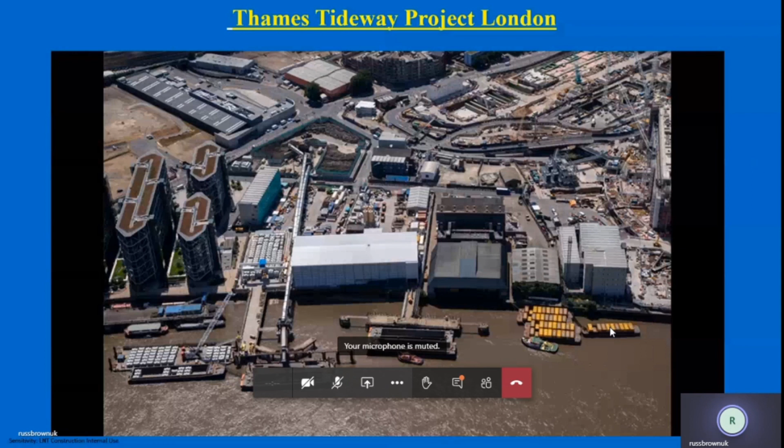So Transport for London, who's obviously one of the main stakeholders in us working and getting permits for all kinds of things, stipulated everything had to be by river. So lots of things came by river: cement, segments, and the spoil, obviously the big one. So we had to spend a lot of money on the development of conveyors and things like that. So that's just kind of where we are.

So in plan view, that was Kirtling Street we were just looking at, and the one tunnel came west towards Carnwath Road. That has actually finished and was amazingly successful, no problems. Now the other tunnel is just under 8 kilometres to drive to Chambers Wharf here. At the moment it's parked up at a place called Blackfriars, and it's done about half of its distance.

That also, by the way, is the tunnel which we started second. The reason we started the longest drive second was because this tunnel here we always knew was the easy tunnel for ground conditions, but within about 600-700 meters of launching this tunnel, we had to pass under another tunnel, which they call the Water Ring Main in London.

So there's a tunnel under London. It's about a 4 meter diameter tunnel, but it goes around London, and the ring probably has a diameter of 15, 16, 20 kilometres, something like that. It's all over London. And it's basically got fresh drinking water in it, pressurised water.

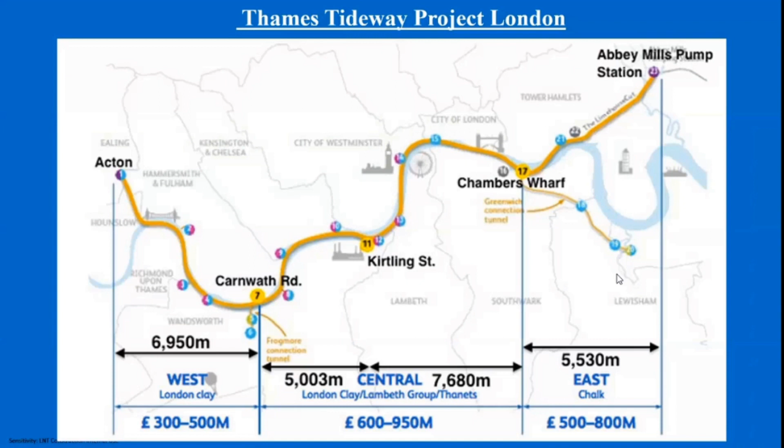So just a quick overview of the project and a general overview. Tideway is the largest water infrastructure project currently under construction in the UK and will modernise London's major sewerage system, the backbone of which dates back to Victorian times, although the sewers built in the mid-19th century are still in excellent structural condition.

The hydraulic capacity was designed by Sir Joseph Bazalgette for a population and associated development of 4 million people, where it's 3 or 4 times that now. Continued development and population growth result in the capacities of the sewer system being exceeded, so that when it rains, there are combined sewer overflows to the tidal Thames performing as planned by Bazalgette. So when it rains, all the sewers are overflowing into the River Thames.

To reduce river pollution, risk to use of the river, and meet bespoke dissolved oxygen standards to protect marine wildlife, discharges from these CSOs must be reduced. The Environment Agency has determined that building the Tideway tunnel in combination with the already completed Lee tunnel, that is another tunnel which is at the end of this Thames Tideway. The Tideway tunnel connects into the Lee tunnel, and the Lee tunnel is farther east.

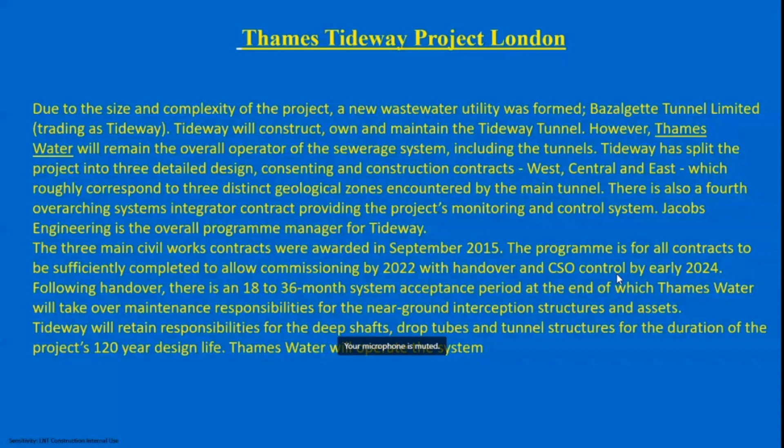Key elements of the contract. This presentation covers the central contract, which was an initial tender value of £750 million, times it by 92, 93 will give you rupees, or 1.2, so it's approximately $1 billion US, and is the largest of the 3 area contracts, which is a JV between Ferrovial Agroman, a Spanish company, and Laing O'Rourke Construction, which is a UK company. It's the main contractor, and they've appointed a main designer for the permanent works to provide the detailed hydraulic, civil, structural, MEICA and architectural design.

I'm going to kind of executively go through this rather than reading every word. Main tunneling activity is focused around the Kirtling Street site adjacent to Battersea Power Station, where 2 TBMs will drive out of the shaft, one for a distance of 5 kilometres to the west to get to Carnwath Road in Hammersmith and Fulham, adjacent to Wandsworth Bridge, and 1 driving just under 8 kilometres easterly to go under Tower Bridge to meet the east contractor, which is Vinci and Costain, at Chambers Wharf in Southwark.

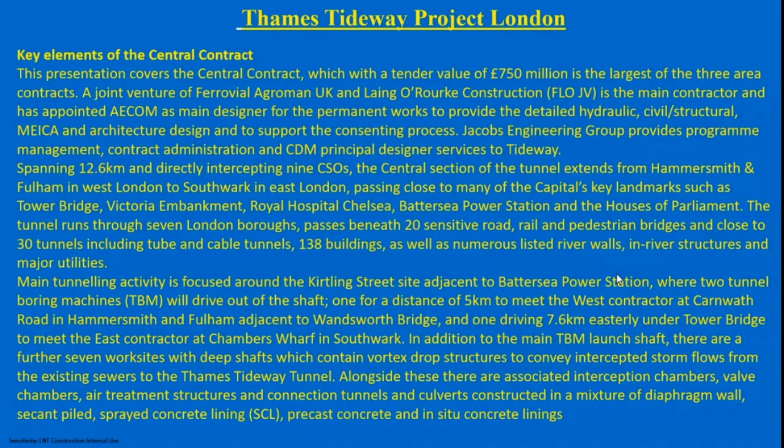Okay, key drivers and design challenges. While the west contract of the main tunnel is predominantly in London clay and the east contractors are in chalk, the central section covers a range of ground conditions with sands and gravels forming major constituents. We kind of spoke about that, and we'll look at a general layout later. So I don't really want to go much into this page, but it's there for your reading later if you'd like to. So I'll move on to the next page.

So this is Kirtling Street. You've got this 5-kilometre drive going uphill towards Carnwath Road, because of the sewerage works. This is Abbey Mills pumping station here. It drops water into here. This connects into the Lee Tunnel. About 6, 7, 8 kilometres past this shaft here is the Beckton sewerage works. So all this is gravity flow down to that.

This is the central section in green here, Kirtling Street. In between Carnwath and Chambers, I think there's something like 2 shafts this side and 4 this side that we connect into, for dropping the water down into the central section. You'll see some of those in a second. When you look at all these, it's predominantly clay. This is a very good solid London clay here. Now it says sand and gravel here, but a lot of this area up to about here is predominantly very, very high clay content. It's not what I'd describe as sand and gravel.

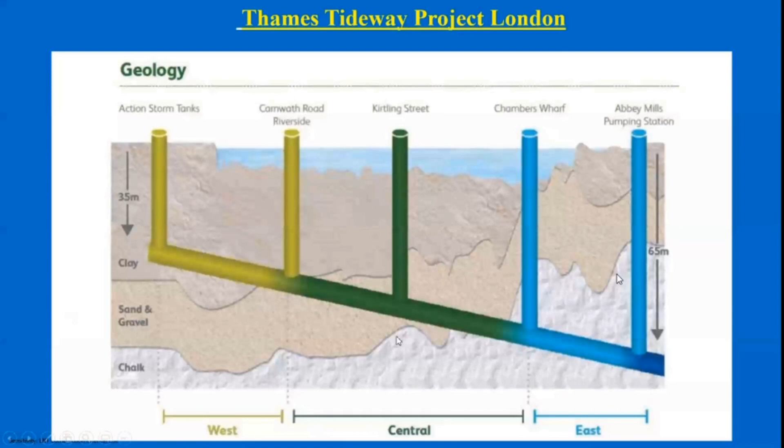Okay, this is a typical picture of what they say is kind of sand and gravel, so it's just a very general notation. But this is typically what we found when we did these caverns to launch the TBMs. You've got this very stiff London clay up here, the upper mottled beds as it's called. Then you've got the lower Thanet beds, and when you look at these, there's all kinds of river deposit shells, all kinds of things. This was a concern for us.

These sand lenses here, not because there's water in them, they were very, very strong, very compacted lenses, where in fact I ended up putting more roller cutters on the TBM because I think they would have damaged the scrapers. Some very, very hard lenses. And the trouble is, we didn't know how far these could go. They could go the full length or just stop after a few hundred metres.

They can undulate, so it's very difficult to know where they are. And then here you've got gravel beds, and then below here you would get this Thanet sand for maybe 10, 15, 20 meters thick. And then below that, you'd get the chalk.

London is basically built on clay overlying chalk. And then obviously you get different zones of that for about 15, 20 meters. Then you'll get this transition from very solid London clay all the way down to the sand. So you get different kinds of mixtures as it's coming down.

London has lots of water. It gets pumped out of the ground, as it does in a lot of countries, for private use, for factories, for all kinds of uses. And what's interesting, by the way, is that London's water levels are rising by up to nearly 1 meter a year, and it sounds an enormous amount. And it's apparently speeded up in the last few years, through industry not pumping water out of the ground, whatever the whole reasons are.

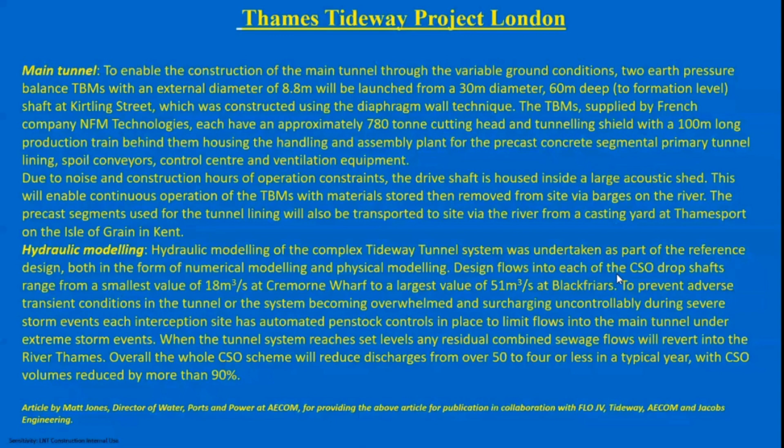So that's kind of a long introduction, but we'll quickly show you some pictures now so you can get a better understanding of the project. So this is the central section. This is Kirtling Street. We had 1, 2, 3 shafts, CSOs picking up sewerage on this side. This was under the central section because the TBMs broke out at Carnwath Road. So you've got 3 on this side, and then we had 3 on this side.

The 4th one, this Blackfriars Bridge, was also a vortex shaft. We actually looked at missing the TBM altogether and driving around this, but it was very difficult. This had a huge amount of water that dropped down this shaft, and we couldn't design the cross passage to handle that flow.

And the other thing, which was my particular effort, dealing with all the joint venture, was to say, look, we need to park the TBM in here to refurbish it, because this short length here is very risky soil because of the sands. We need to refurbish it to a very high level, to a new level. Put new tail seals and new cutter discs.

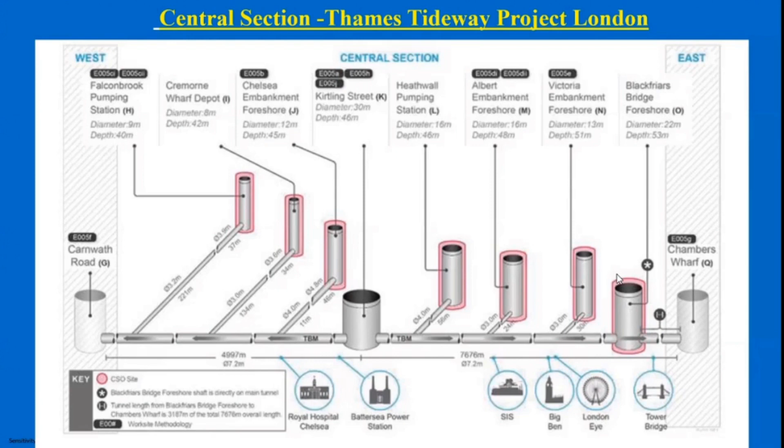Okay, so Thames Tideway Tunnel. We had the West Drive, which had an aspect opening ratio of 50%. It was a lot easier clay, a lot of easy digging. That's me there, by the way, at the factory acceptance test in Le Creusot in France. And then the East Drive had a smaller opening aspect ratio because of less clay, more sand material. It was designed by NFM, and we agreed everything.

So these are the 2 main project managers for NFM. That's myself, and we went there and did the FAT tests. NFM is the French company. At the time they were building the TBMs, we realised there was something going amiss with the manufacturing, and we had lots of suspicions. There were some problems, and they eventually told us that they were probably going into receivership, and they did that.

They were owned by a Chinese company at the time who basically pulled funding and left them a bit of an issue. So they've now been bought by another tunnelling supply company called Mulhauser. Mulhauser supply locomotives and rolling stock. I'm sure most of you may have heard of Mulhauser. That's now who owns NFM, and I hope they keep going, because they're a fantastic TBM engineering and manufacturing organisation.

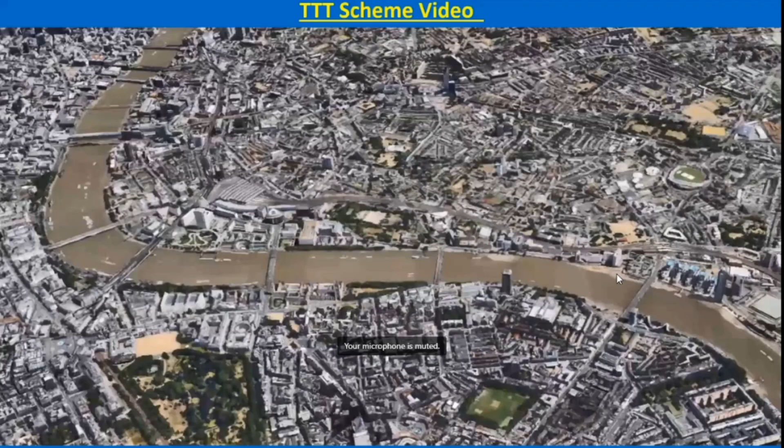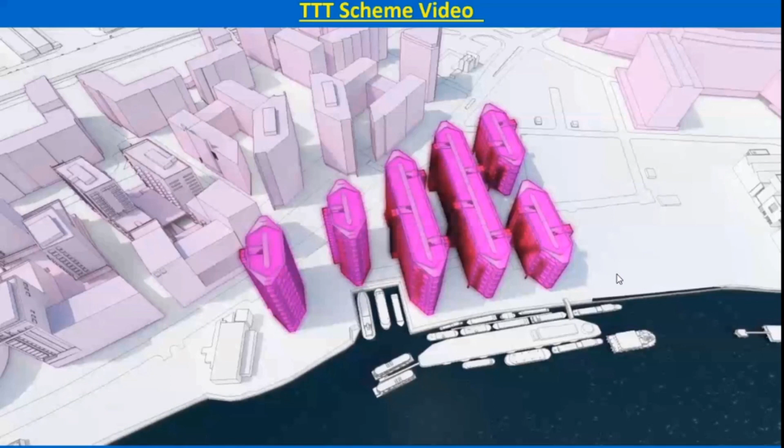Kirtling Street is key to the success of the central section of the Thames Tideway tunnel. It's the primary worksite for this contract, and it's here that the main tunnels commence their respective journeys to the east and west. The site is also right at the very heart of the Nine Elms on the South Bank regeneration programme, currently the largest of its kind in Europe. The Ferrovial Laing O'Rourke joint venture understand the concerns and aspirations of the many stakeholders in the area, such as the new Riverlight residents, Nine Elms houseboats, the Battersea Power Station development, and Cory Environmental, many of whom are already familiar with the JV, having recently been appointed principal contractor on London Underground's Northern Line extension, of which the main site lies just south of the Kirtling Street worksite.

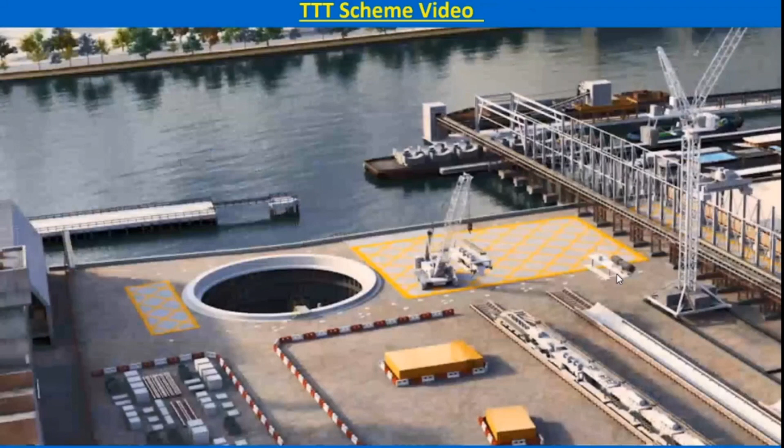As principal contractor, they will be able to seamlessly coordinate site logistics and both vehicle and marine movements. This advantage also applies to the maritime consents required with working within the river foreshore, something that the JV have a lot of experience with, having extensively used the river as a delivery route during the construction of the London 2012 Olympics, and now the Northern Line extension.

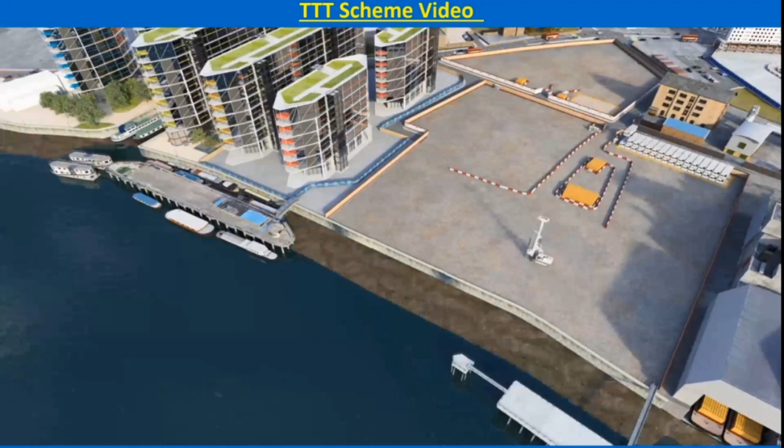On site possession, the initial mobilization will commence with the erection of the hoardings and the laying of a concrete hardstanding to enable the site accommodation and welfare offices to be constructed. The major piling works for the loading jetties, gantry cranes, camp shed and foundations comprising of both marine and land-based units will start concurrently. Sheet piling will be installed to enable the safe excavation of the drop shaft down to first formation level, after which the construction methodology will change to sprayed concrete lining.

The construction of a travelling hopper or conveyor system for spoil removal and a gantry crane for material deliveries will be assisted by the erection of a 50-metre rail-mounted luffing jib tower crane for general site distribution and construction duties. During the construction of the shaft and launch chambers, a pair of EPB TBMs will be delivered by barge and assembled on site in readiness for pre-testing and commissioning. After which, they will be lowered down the shaft to commence their drive east towards Chambers Wharf and west towards Carnwath.

During the main tunnelling stage of the works, a full-height enclosure will be built to minimise noise and dust pollution to the local community. The first TBM will drive westwards towards Carnwath Road, followed by the second TBM starting its drive eastwards towards Chambers Wharf. An elevated conveyor, including a vertical section, will be used to bring the spoil from the TBM up to the spoil heap at ground level in the southern compound, prior to depositing it by travelling hopper or conveyor system onto the awaiting barges. With the TBM tunnelling operation in full swing, the site layout and associated marine movements continue with a routine of spoil removal and segment delivery and storage.

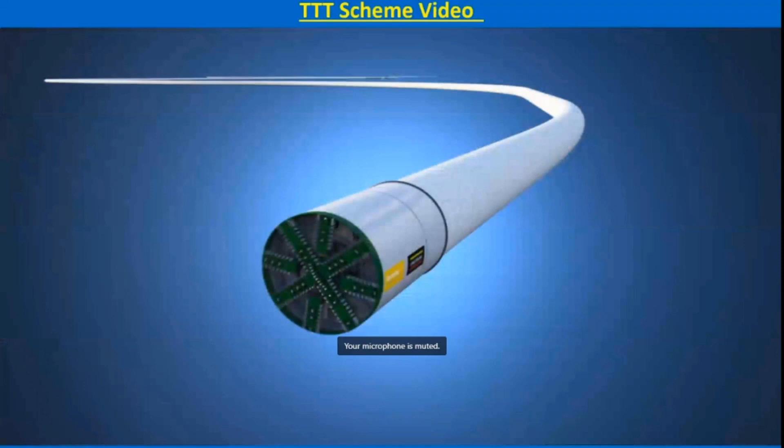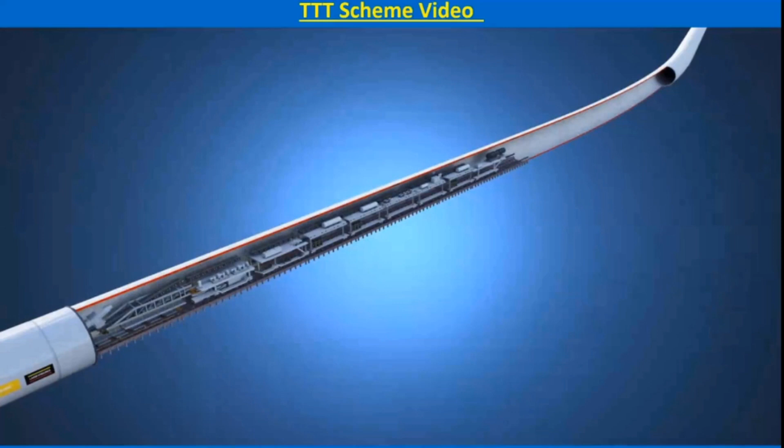In readiness for the construction of the concrete secondary lining, a batching plant and conveyor to the existing Cemex jetty will be built. The shorter western section of the tunnel will be completed first, and the TBM parked just short of the receiving chamber at Carnwath Road. With the primary lining of this section of the tunnel completed, the secondary lining works can begin. Commencing at the rear of the TBM backup, the secondary lining will be installed working back towards Kirtling Street. Rebar cages for the secondary lining and tunnel segments will be delivered by barge and stored in the yard for subsequent delivery to the tunnel via the gantry crane and drop shaft.

Upon completion of the longer eastern drive of the TBM to Chambers Wharf, the site will revert to servicing predominantly the secondary lining works. With all the secondary lining works completed, the last major works will be the construction of the ventilation shaft. During this period, the noise enclosure will be dismantled and the site made ready for decommissioning. And finally, site hoardings erected around the northern and southern compounds for future development.

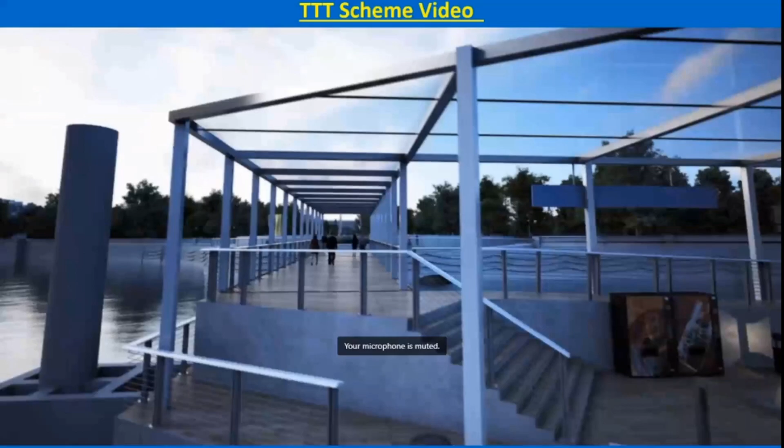The JV will work with the Prince's Trust, local authorities, schools and colleges to bring new skills and employment opportunities across the lifetime of the project and long-term career opportunities for the local community. The Ferrovial Laing O'Rourke joint venture are committed to working collaboratively with Thames Tideway Tunnel and all Alliance participants on the adjoining contracts to create a cleaner, healthier River Thames and to make a real difference to London's livelihood. A legacy for future generations.

Okay, sorry, can I just say, you heard that audio okay on that video, yes?

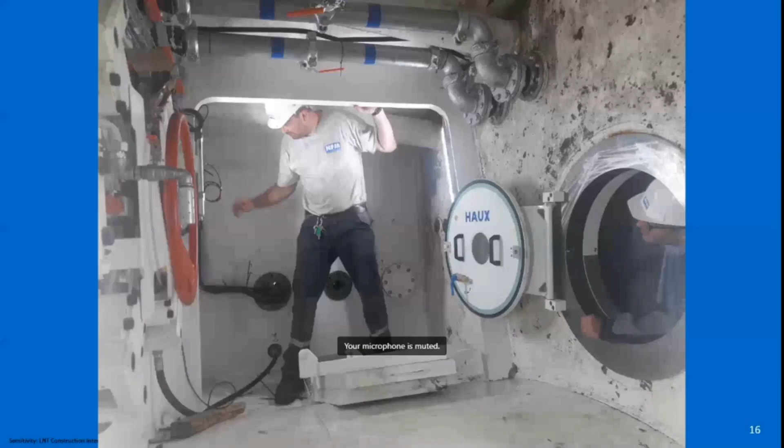Yes. Good. Okay, just a couple of shots now of when we went to do the factory acceptance tests in France. This is always great in EPBs if you can get it. We've got the decompression chambers here, and then an ante-chamber before you can go into the cutter head. It's always good if these can be designed in, particularly when you could be working in very high compressed air. And so we ensured there was this kind of large ante-chamber before you got inside the cutter head.

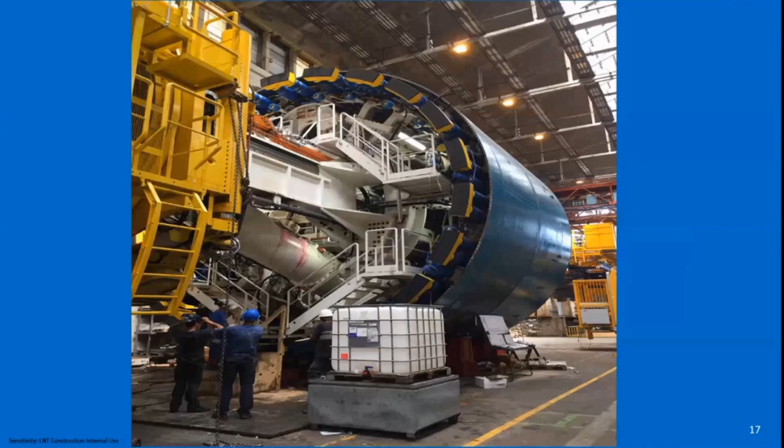Just some general pictures. Okay, the project scope, the TBM delivery, lifting and transport of TBM components from the jetty. So what we'll look at now basically is how we delivered the TBMs.

They had to be driven from Le Creusot in southern France, which is near Lyon, up to Zeebrugge port, on the outskirts of kind of Germany, going into Belgium and Brussels, and then there they got these ships, which then brought them across the English Channel and around to the Thames. The Thames leads into the sea, and they were brought up a long way along the Thames into West London.

The trouble we have with that is the large ships, the vessels that had to come in to bring this equipment in. We had to bring them in during, let me get this right, during a neap tide, if I think I've got it the right way now. So we had a one-week window in every month approximately to bring TBM components in, depending on what was happening. And it can only happen during a neap tide. I think I've got it the right way around.

But basically what it means is the barges could only come down the Thames when the tide was flowing out, when it's on a low tide. And that is because a ship coming up, you need to park. You can't park it up with the tide running away from it, if that makes sense. So say the ship is coming from the east. You need the water running east and the ship moving from the east towards the west so it doesn't float away with the tide. So the barges can help stop the movement of the ships.

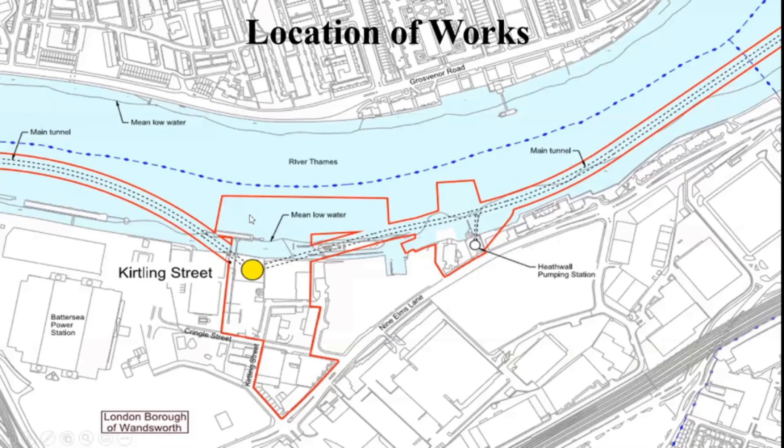So what we did is we had to build this special shear leg crane with strand jacks to unload the ship. So this is a ship, this is a jetty we built, and then we could bring these SPMTs, this here, up through this shear leg, which you'll see a bit better.

And for this one, I'm just trying to think, we would bolt two of these together, because these units, these wheels can turn 180 degrees. They can almost turn on their own radius. And we used to bolt two of these together.

What we did is we brought the component parts by ships, built the TBMs up on the surface, then transported them and lowered them underground, which you'll see shortly. And we did that by bolting 4 of these together later. You can actually connect these together, and by one controller they all work. So this is kind of the equipment we use.

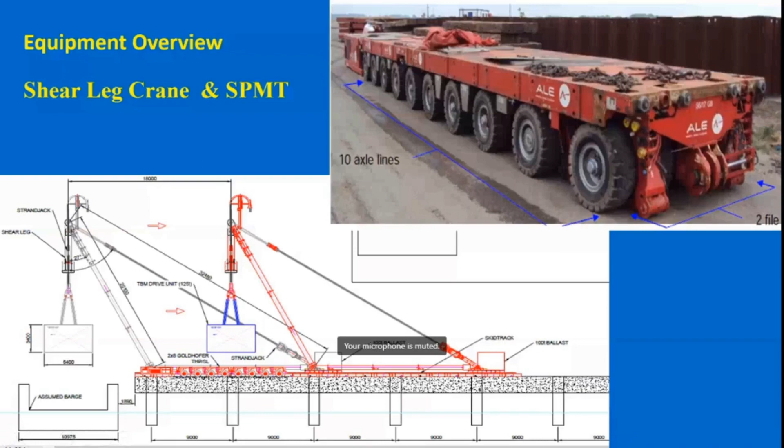You've got these special gantries, these special jacking, sliding, so they can move, and these are the strand jacks. So there's always load on, and it's for heavy lift type equipment. So this is the setup. This is us building up the strand jack system.

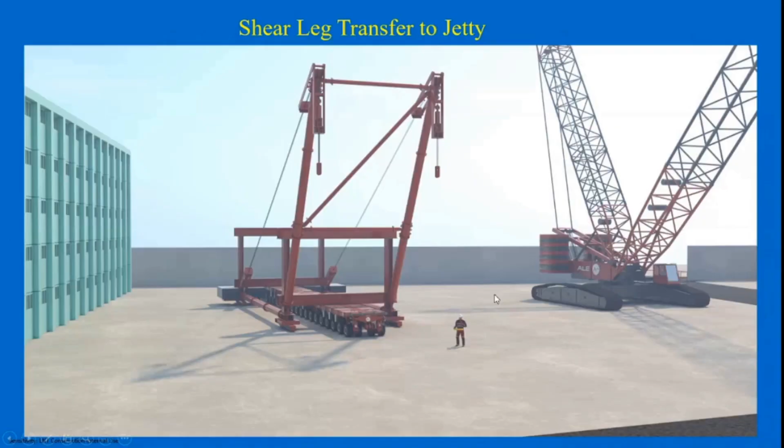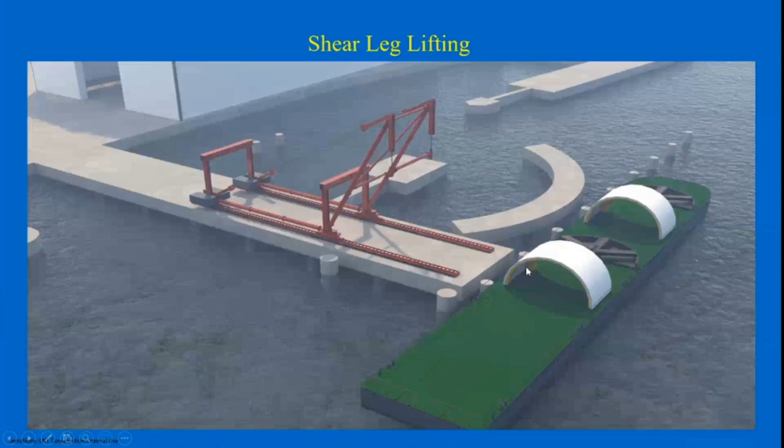So that's how we built up, so we could get the SPMTs underneath here, put the SPMTs in to actually move this onto the jetty and await shipments. Then we could unload the boats, put them on the SPMTs, and move them back.

What we did is we had this strand jack. I'm sorry it's a bad image, I couldn't find a good image of it, but here it is. We only actually used it for one shipment, and then right at the very last minute I was able to change what was on this shipment to the point where we had something like 10 days before another ship came in.

And to be honest, this thing was very, very slow. So I had 10 days to dismantle it, take out the runway it ran on, like a railway type thing, and then bring in the big heavy crane, which we already had there, because this was faster. From memory, the weights were 5 ton less, so it allowed us to use this crane, because we had a weight limit on the jetty we built, so we changed it.

So we only used it for one load, and we managed to put all the heavy pieces on one shipment and then get rid of it. So we put the 2 bearing pieces in here. Those were the heaviest loads.

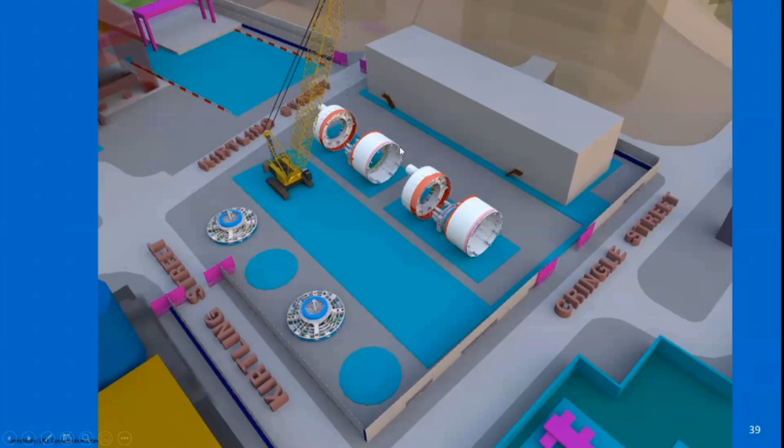Okay, so we then unloaded the pieces in our laydown area. We built up the gantries, and this is the 2 TBMs parked up, built. Now this distance from here to here is approximately 3 meters. When you consider you've got a TBM nearly 9 meters, that's 12 meters in the air. The scale of it is massive.

And the reason we did this was because these cradles here were also a lifting beam to lower it down the shaft. So they weren't just to build it, they had other loads, so that's why it's quite thick, heavy steelwork. And then we need to bring in these SPMTs to pick these up and move them into the shaft. Then these are just columns, dismantled, so we could pick them up and move them into the shaft.

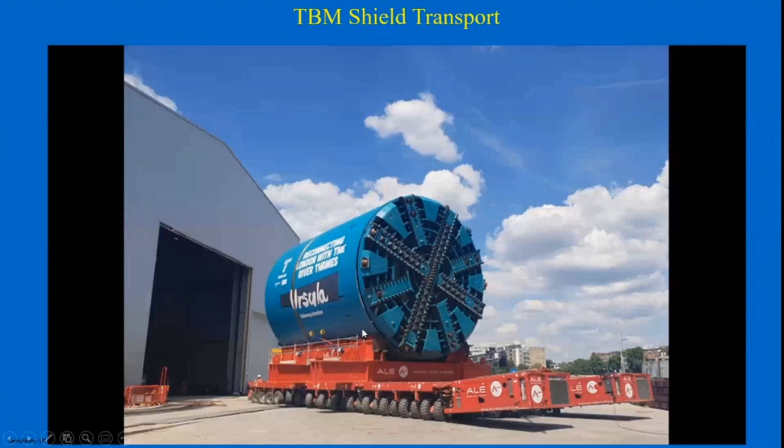You can see, this keeps jumping by itself. There's an actual position. And we actually bolted 4 of these together, so you've got 1, 2, and then 2 on the other side. And you can see the angle there, it's almost turning on a 0 radius, if that's correct. From here, it's literally turning on itself. It's amazing equipment, and I don't know if any of you have seen or used these, but we use them a lot in heavy lift TBMs.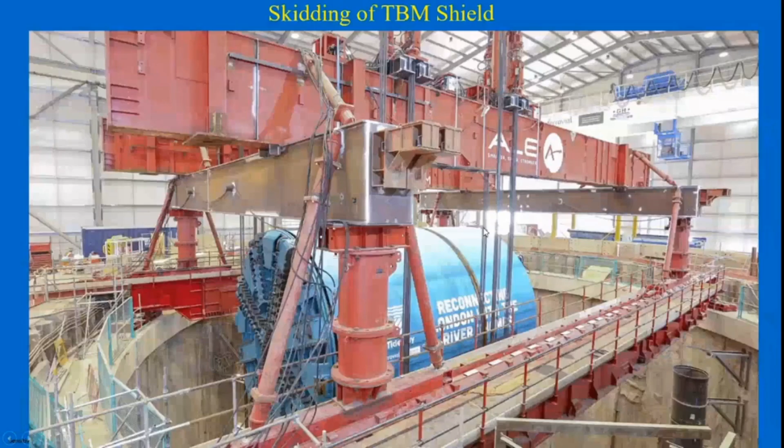So what we did then is we took them into the gantry, and we then built inside our acoustic barrier. The shed, we use a massive big acoustic barrier, and it's built at high level. Bring the TBM in, then lower the heavy lift gantry, move it over the shaft like that. This is the actual picture, of course, and then we could lower it down to the bottom of the shaft.

It took about 7 hours to lower down, and then what we did is we put SPMTs underground, and the reason for that is the crane, this heavy lift gantry we used, couldn't turn the TBM, it just lowered it in one position. It's not like a normal crane where the hook turns type of thing. With this kind of equipment, it doesn't turn, so you've got to put something else down there to align it

with the two drives. We'd actually built 2 tunnels 37 meters long, which the TBMs were then going to go inside of. I was under a lot of pressure to only make them 25 meters, but in the end I managed to get approval to make them 37 meters long, because we could demonstrate that by making them longer, we saved time, because we were able to build the minimum number of gantries that needed to be there, because otherwise one gantry would have had to go down into the shaft to power the umbilicals, and it would have been in the way.

So by making it another 12 meters longer, from 25 to 37, it saved time on reinstalling another gantry later, and it speeded up commissioning and the initial drive. So we could save nearly a week doing that. Although to dig, you could imagine, this was getting on for nearly 10 meters. Not NATM, it was an SCL tunnel. Got to be careful there on my terminologies on design. 2 SCL tunnels were built. So it put more time on the program, but overall we could demonstrate it was less because of the TBM commissioning.

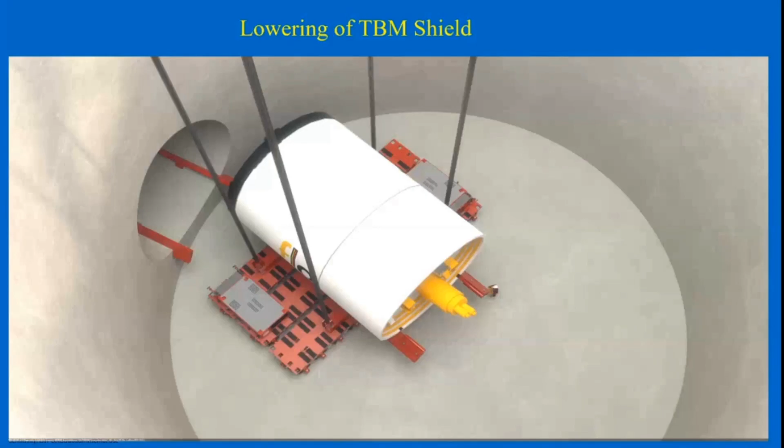So we dropped the TBMs down onto these SPMTs. We could align them then with the tunnels. As you can see, it's aligning now with the tunnels. Push them in, using the lifting gantry, which was part of the system. We could jack the TBMs forward into the caverns, into the chambers, and then we built in this

SCL cavern. We had quite a large thickening there, and we had to be very accurate on alignment, where we then bolted on a shove frame and a sealing and a special double seal, same as the one we're using in Bangalore. So we could inflate the seal around the shield. So when the TBM launched, you had a seal around the steel can. And then as the TBM moved off the seal, there was a secondary balloon, a secondary layer, where you could inflate it again, and it would inflate along the segment.

It's kind of normal practice to do that in these caverns, so you stop against any kind of pressure; we could have had something like 3-bar pressure. There was some depressurization taking place, and we had depressurization wells, but there was a big issue there on potential high water inflows. Sometimes what you can do as well, we didn't need to do it here, is once the TBM has gone in 1 meter, we'll inject around the TBM. I'm going to use the word clay shock material.

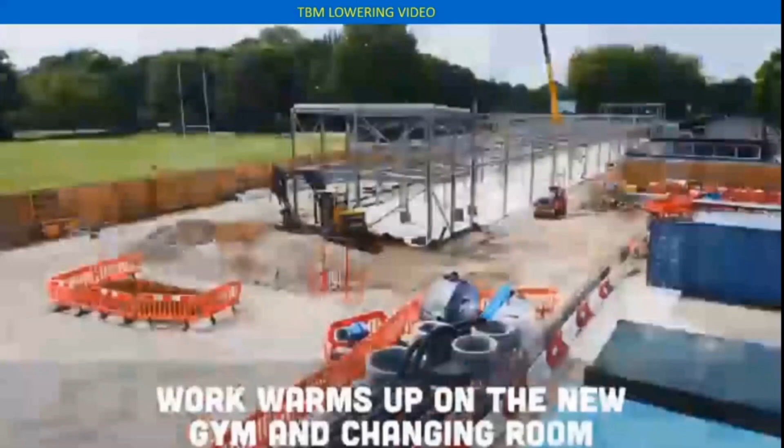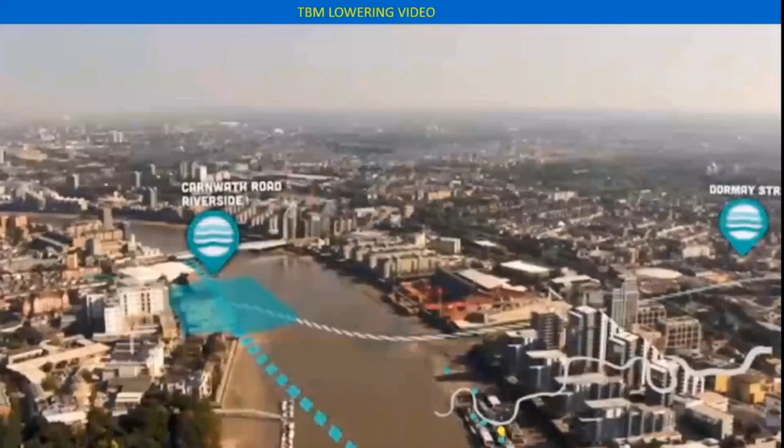We've had some good completed work, so we've actually finished our River Wall 922 strengthening works, which is right down the other side of our site over here. We're now in the process of handing back to London Borough of Hammersmith and Fulham for them to complete the reinstatement of that footpath and to give this back to the public.

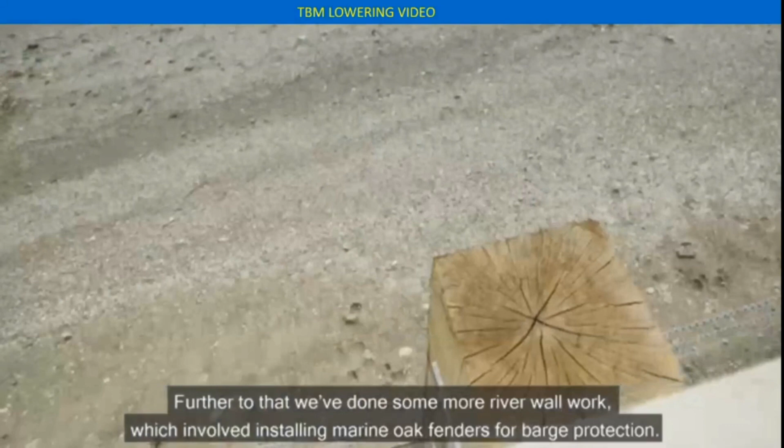Further to that, we've done some more River Wall work, which involved installing marine oak fenders for barge protection. These will be things that we left in place for the safety of the public when they're yachting or rowing along the River Thames themselves. We've had to install maybe 9 or 10 pressure relief wells that we can go and pump, lower the water level down, which allows us to carry on shaft excavating without causing a safety issue.

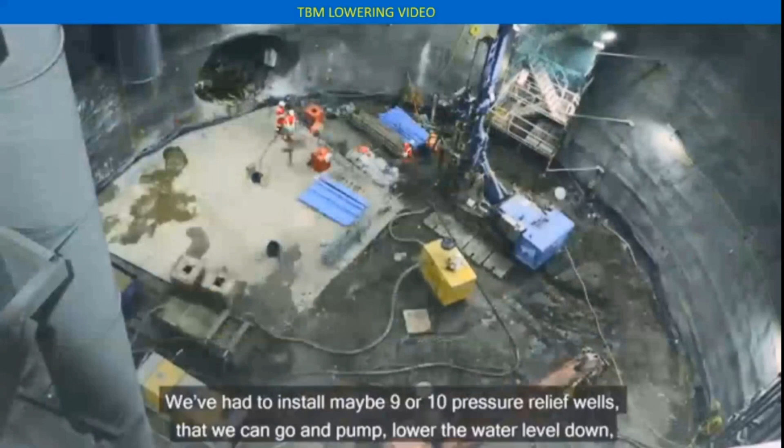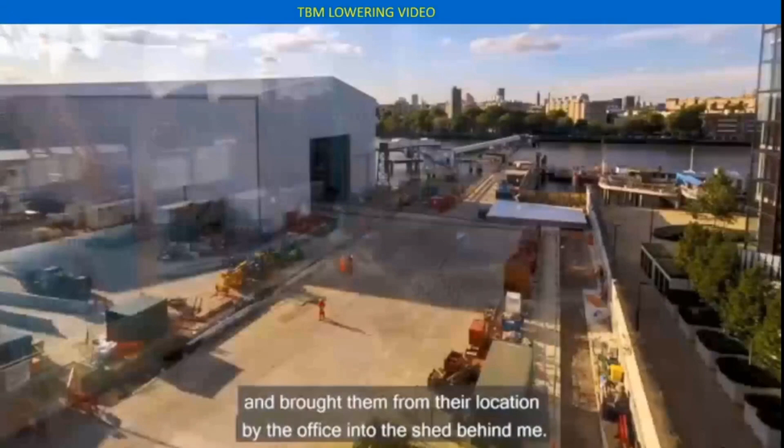We've prepared this site, the TBMs arriving, now they've been reassembled and they're ready to go down the shaft behind me. We put them on these movable units known as SPMTs and brought them from their location by the office into the shed behind me. The plan is to take her into the shed, do our test lift, get her all ready. We will lift the gantry up over the TBM, lower it back down, connect it up, test lift, skid it out into the shaft.

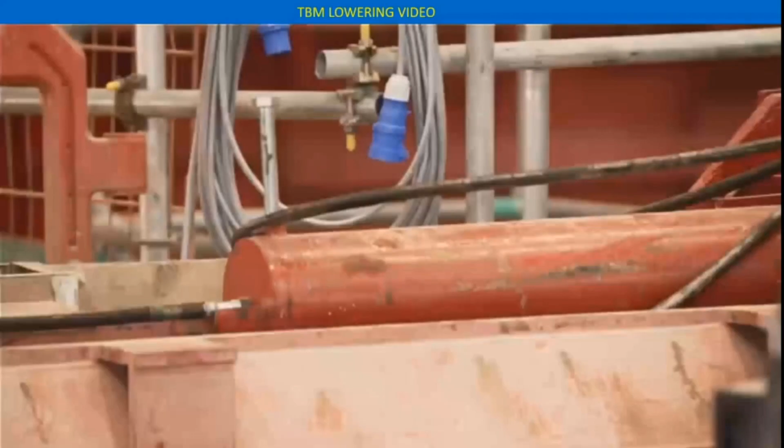Given that it's a 1,000-ton lift, it needs some heavy-duty lifting equipment. The machine we're using is called a strand jack, and it's essentially clamped in 4 locations, so you've got that extra measure of security and safety. From there, over about 8 hours or so, it's going to be lowered very, very slowly to the bottom of that 53-metre deep shaft, and then jacked into position into the tunnel adit.

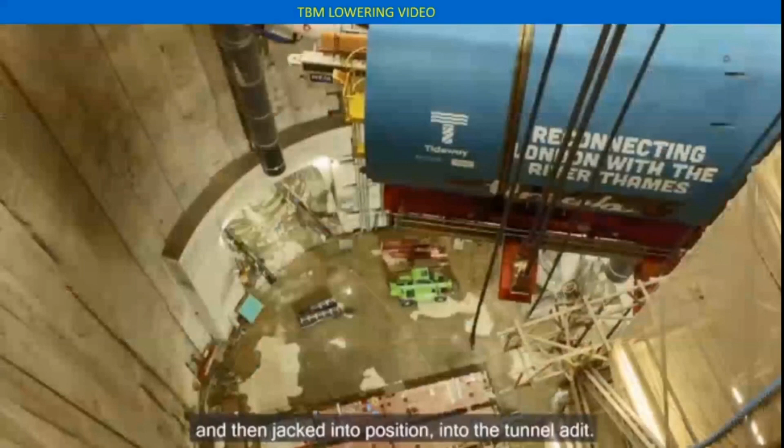The Eagle has landed. We know that we're really getting serious now about the start of the tunnelling operations. There's almost 25 kilometres of tunnel to be built. Just to be here to see the start of that today is really exciting.

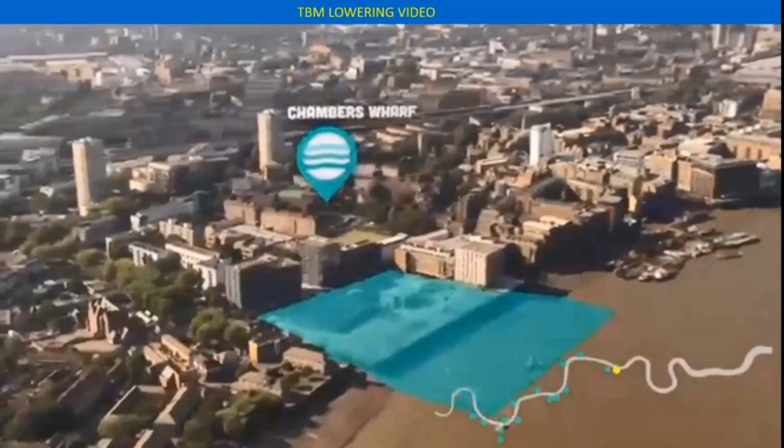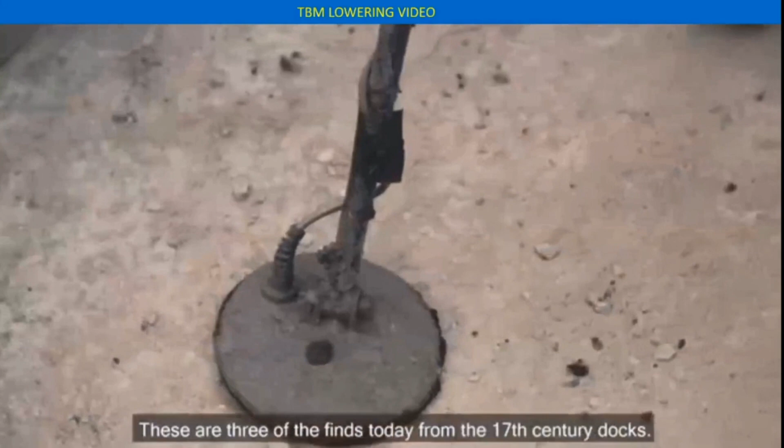We can start our main bulk excavation for our shaft. We have a team of archaeologists on site excavating down for 6 metres. We in 2015 already excavated some archaeological trenches, and back then we found a series of river walls or revetments. Well, these are 3 of the finds today from the 17th century docks. They've just come out. One's a William III penny, 17th century buckle and some kind of ring.

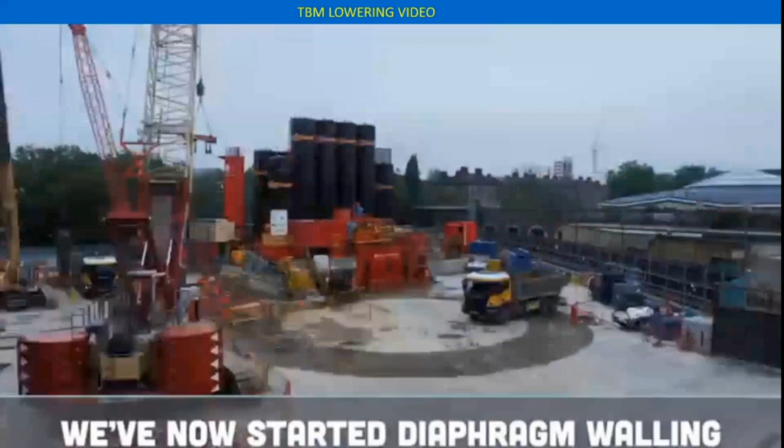Done really well so far. If you don't get that thing down that shaft, it's not going to be able to do its job. It's really exciting. Was it easy? If it looked easy, then we've achieved our aim.

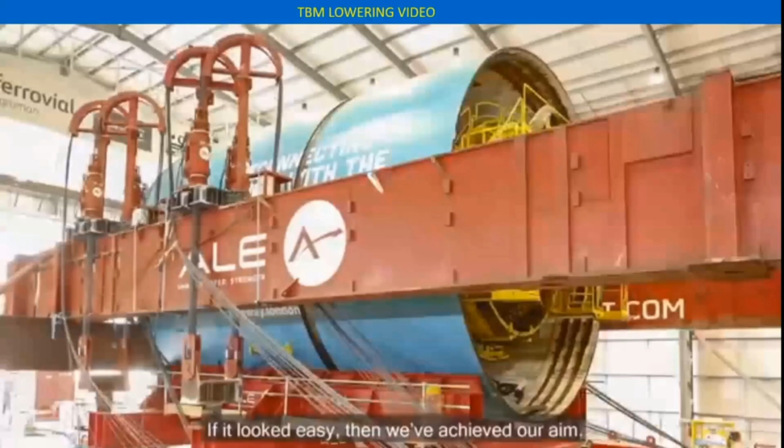Okay, just again, we're coming near to the end of the presentation. You heard the audio to that video as well, yes? Yes, sir. Okay, good.

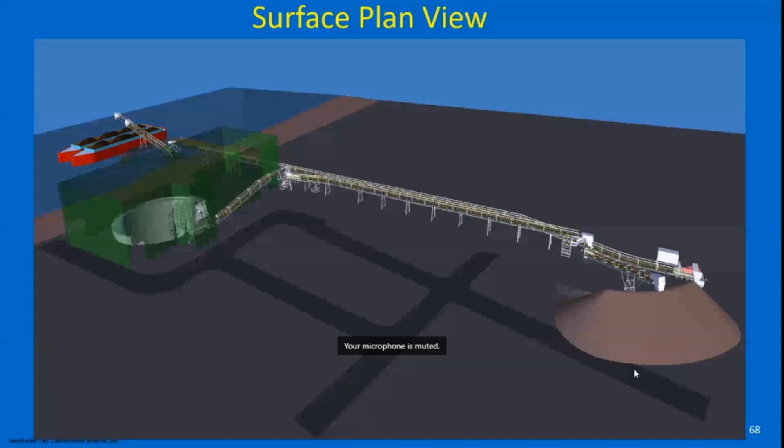What I want to show you now really is just the conveyor setup, what we did. This is the shaft here. We've got vertical conveyors coming up onto a cross conveyor. So the way the soil came up, it came up here, then it went to this storage area here, and this was a busy Kirtling Street here, so we had above ground conveyors above this. The reason they're above here is because they have to cross a busy road. And then we had a buffer area here.

Russell, the audio is off again. Thank you, Sandeep. Whoever has joined in the last 30 minutes or so, if you have any questions, you can post them in the chat box of this webinar, and we will take them to Russell in the end. Okay, I'm back again. You can hear me okay? Yes, sir. Okay, I'll just reload. I'm nearly finished, not much more to go. Give me 20 seconds while I reload the presentation. Okay, can I just ask, you can see the video online?

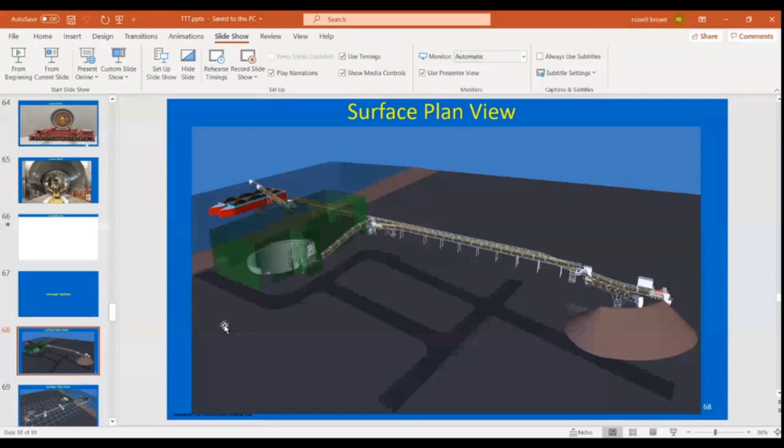Okay, good. So, vertical conveyors here coming out of the acoustic container shed, ran to a buffer stock area. Part of the contract, we had to design a system, and the reason it was quite elaborate is we had to have a system in place where we could do 3 days of excavation without relying on the river, in case there was a problem by river, which can happen on the Thames because of particularly high intensity rainfall. If the Thames Barrier has been closed, you can actually stop tunneling. So that's kind of the outline.

There is a radial stacker there and a radial stacker here. This one was fixed in height. This one could go up and down because the River Thames goes up and down 6 meters. So this radial stacker literally had to run up and down by 6 meters. The reason is you can't drop it from a height because it's wet material. It splatters and you can cause environmental issues with deposits going everywhere and into the River Thames itself.

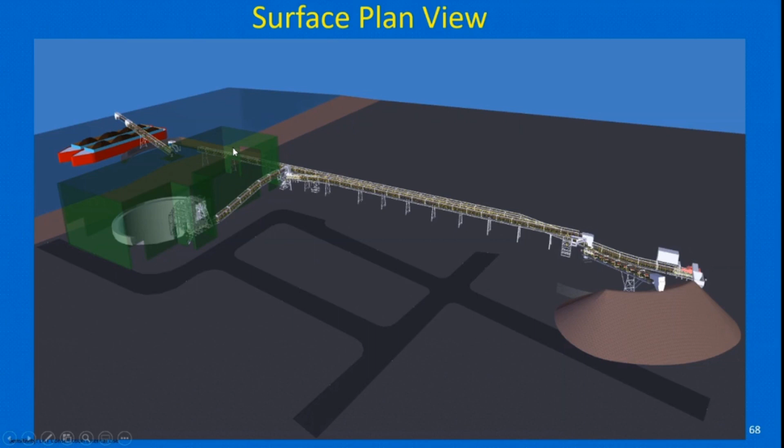So just another view of it in plan view there. This is a closer view. Each TBM had its own vertical conveyor. This is the installation, what the vertical conveyors look like. When we built these vertical conveyors, we specifically ensured we had a walkway around all of them, so we can do maintenance and change rollers. And we also had a walkway down the centre of them, because of the regulations on two means of access and egress, so we designed in maintenance and general emergency access and egress into and out of the tunnel. That kills two birds with one stone.

We had two crane gantries in here. Sorry, the main access you can't see, I do apologize. The main access was an Alimak hoist, 2 levels, so we could carry something like 25 people ferried up and down. The shaft was approximately 60 meters, and you'll see in a minute why we had to design it in 2 levels.

So you've got one level where all the rolling stock comes in and picks up the segments, rails, pipes and things like that, and then we had another layer below that for the conveyors, for the soil to come out of the tunnels, drop down a chute below where the locomotives are, drop onto a conveyor, come across, and then go through a sizer. We want to make sure there's no big clay lumps when we're using these vertical conveyors, so it goes through a sizer, like what we use on slurry machines.

I'm just going to quickly show you a very good video. Now this video was made for the Northern Line extension, but we used a lot of the material from this project. So when it looks at the conveyors in the tunnel and the vertical conveyors and the stacker onto barges, all this happened within a few hundred meters of our tunnel, and we used a lot of the equipment after. So it's only about a 9-minute long video. I won't show all of it. I just want to show you the relevant bits, so I'll speed it along in areas.

Derived from an enormous reservoir of experience and know-how.

Building on the history. Sorry, and can you hear that audio with it, by the way? I can't remember if I pressed the button on this one. Okay, you can hear the audio to the presentation.

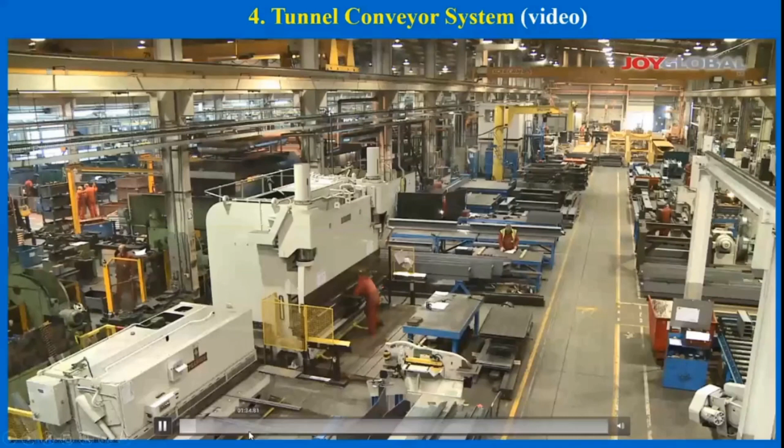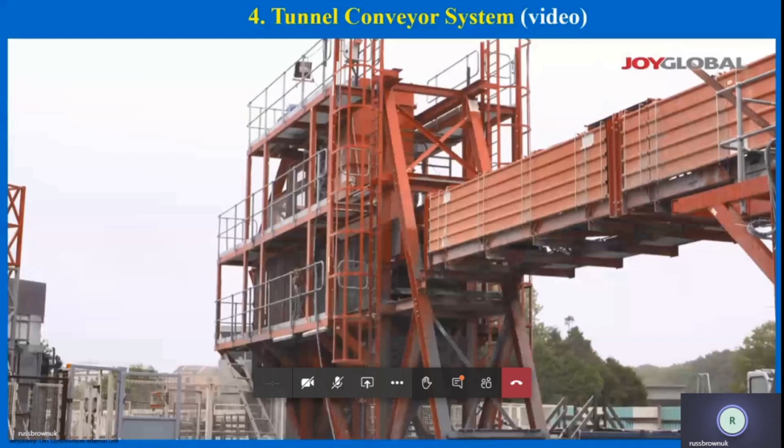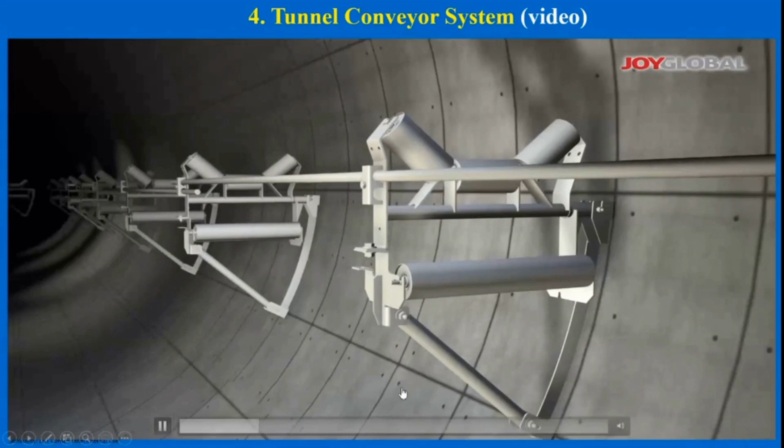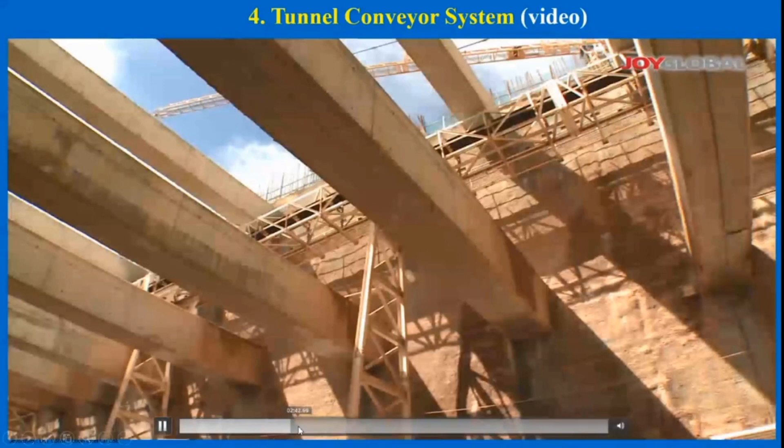Of our legacy brands, Continental Conveyor and Stamler, engineering heritage and adherence to high-quality on-site service logistics. High-angle. Our materials handling equipment can be incorporated to support either traditional TBM or drill and blast applications. Tunnel conveyors can be supported either from the tunnel roof or on wall-mounted brackets. Unlike the use of rail-mounted muck carts, there's no disruption to tunnelling work. As the TBM drives further into the excavation route, new conveyor structure is added from the safe confines of the backup area. Once tunnel conveyors emerge from the ground, they become part of a surface scheme configured to deliver the spoil for additional handling. This can be by transfer to storage for direct spreading, or onward movement by truck or water transportation.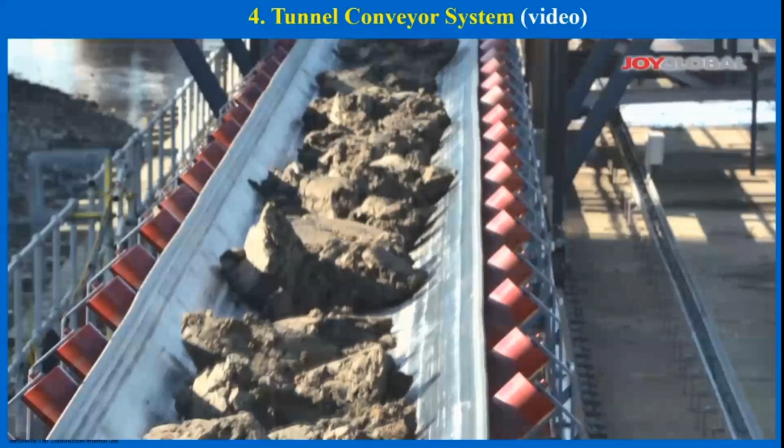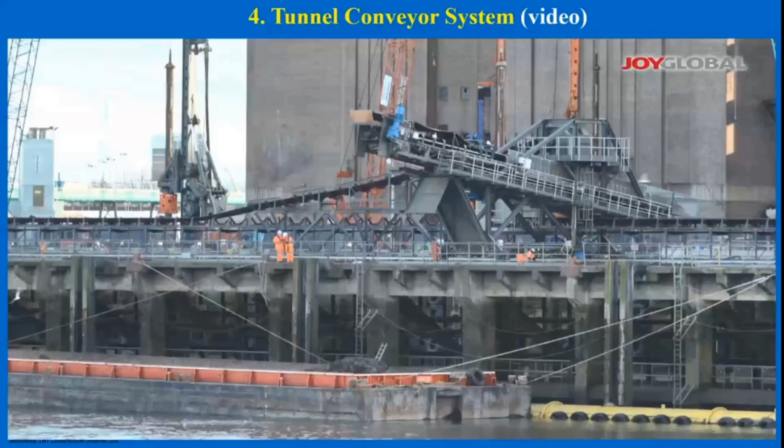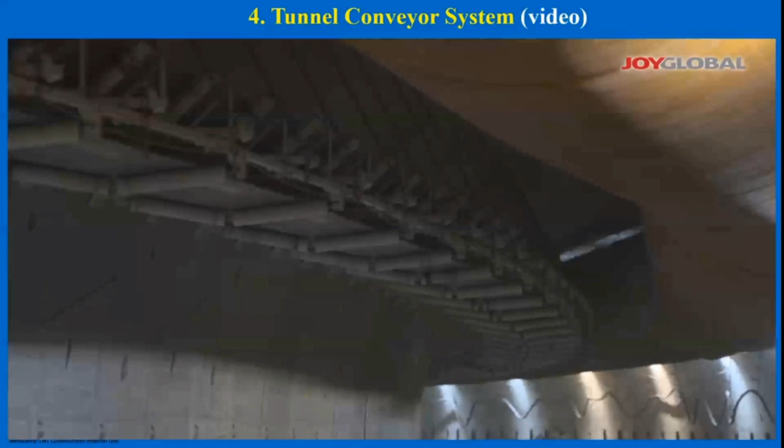The surface arrangement can be very complex and relatively confined, so the need to avoid obstructions is commonplace. Tunnel spoil can be elevated to surface level using a flight of conveyors or via the high-angle conveyor. During this process, the material may also need to be sized. This can be undertaken by our range of material feeders and crushers. As tunnel segments are made ready for transportation to the tunnel boring machine, the wall-mounted conveyor reliably removes spoil without interfering with tunnel traffic. On curved stretches, the conveyor safely contains the spoil as it moves along. As tunnelling progresses, the supporting framework for extending the conveyor is constructed in the backup area of the TBM.

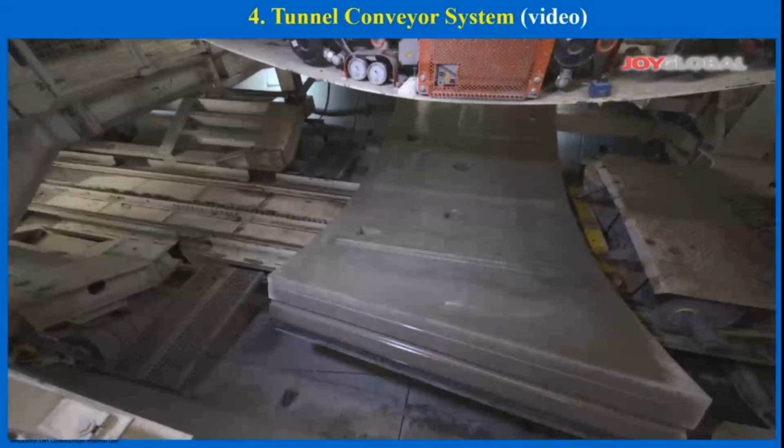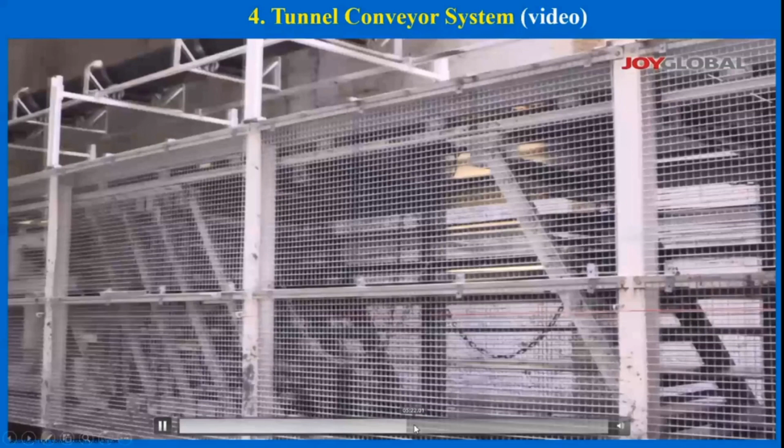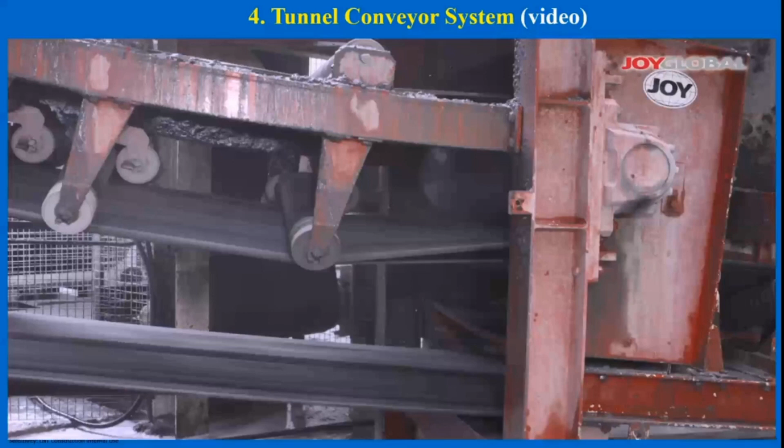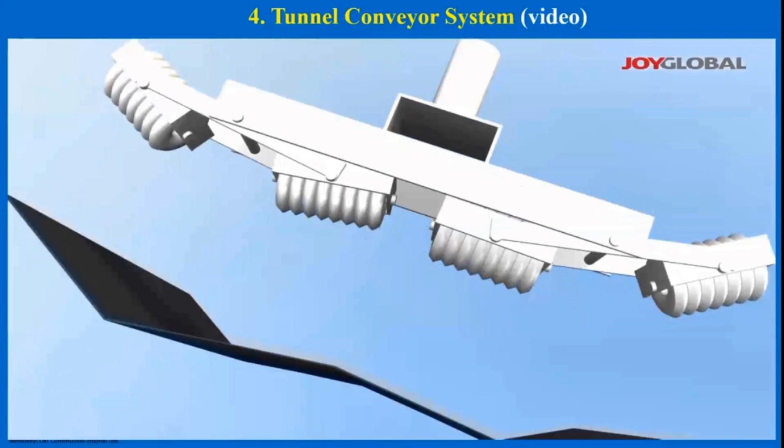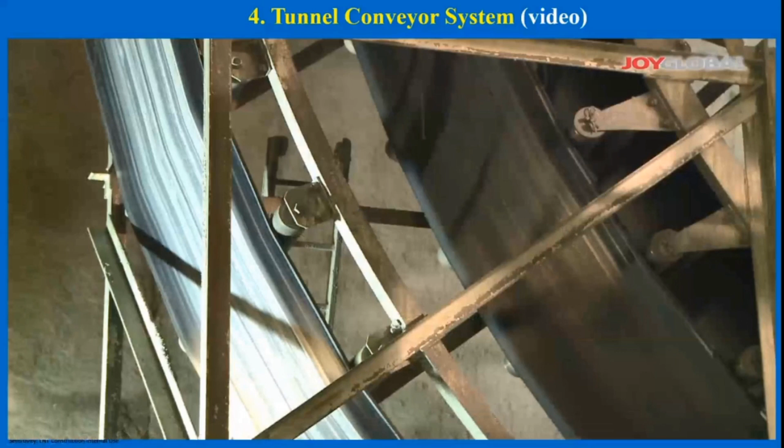If the point of delivery from the tunnel is deep below ground, then it can be carried to the surface using a high-angle conveyor. High-angle conveyors were pioneered by Joy Global to provide an economical and reliable way of elevating spoil vertically or at steep angles of inclination away from the area of excavation. The high-angle conveyor sandwich belt concept involves a fully equalized pressing mechanism which secures the material to the center of the belt while effectively sealing the edges of the two belts together. It holds the material continuously, removing relative movement between the material and the belt. Another factor is that it uses standard belt cleaning components for greater economy when handling wet or sticky material. All of these features mean that high-angle conveyors provide greater efficiency and greater operational control compared with other methods of elevation. They have the advantage of reducing in-shaft traffic, reducing craneage requirements, and reducing downtime, all resulting in lower operational costs and maximizing efficiency. In inner-city locations where space is limited for handling.

Okay, so that's basically how a vertical conveyor works. I'll just kind of conclude very quickly. So we had the vertical conveyors. This is showing the radial stacker onto the barges. This is the radial stacker at the end.

What you've got first of all is, when you saw on that picture earlier, you saw a horizontal belt loop where we normally put 500 metres of belt in to give us 250 metres of tunnelling before we need to change conveyor belt. We don't really like fitting horizontal belt loops inside of tunnels, because when you've launched the TBMs, you then have got a delay in installing them.

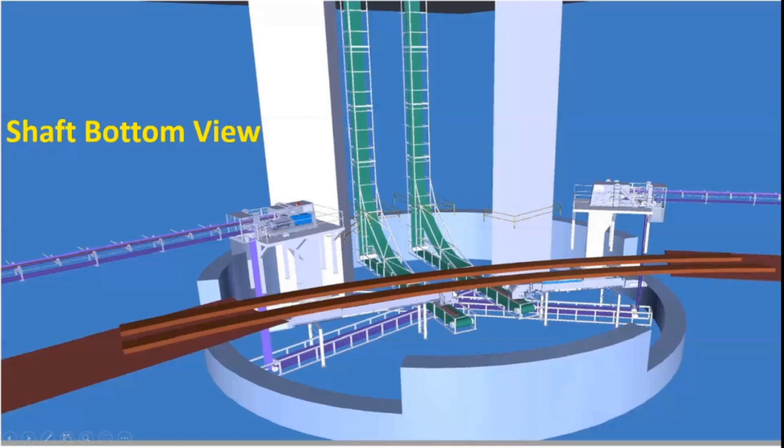You can see a very good view there where the soil comes out, drops down here. This is a sizer, drops down here, comes here, and then you see the 2 belts here. You've got the top belt and the bottom belt. Comes here, then runs up, and it's sandwiched through this here. And then this purple belt here is the actual storage belt for continuous tunneling. Just another view of that. You can see the complexity.

Very quickly, the launch sequence, literally 2 or 3 minutes to go now. So what we did is, this is the 37 meter adit, where we could actually put this gantry. It was very important to get this gantry, for many reasons. This was the main gantry where the soil came out of the screw, came over an angle and came to here, and that would feed onto the main belt to the end of the project. So it was good to get this conveyor in. Otherwise, we'd have to move this location back to here.

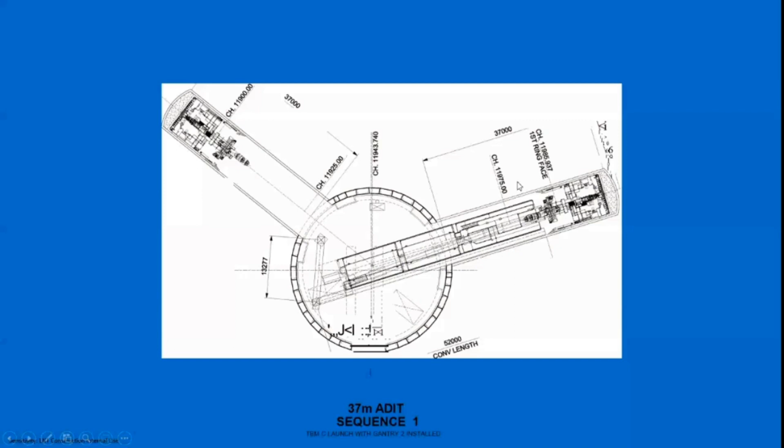It would have meant lots of modification to this gantry. That was the initial plan. When we did it on the program, it didn't really stand up, where we could install this here, or otherwise this gantry literally had to be down here and be part of the umbilicals, so it didn't stack up. And so by extending the TBM by 12 meters, we were able to put this minimum number of gantries on so we could quickly do launching.

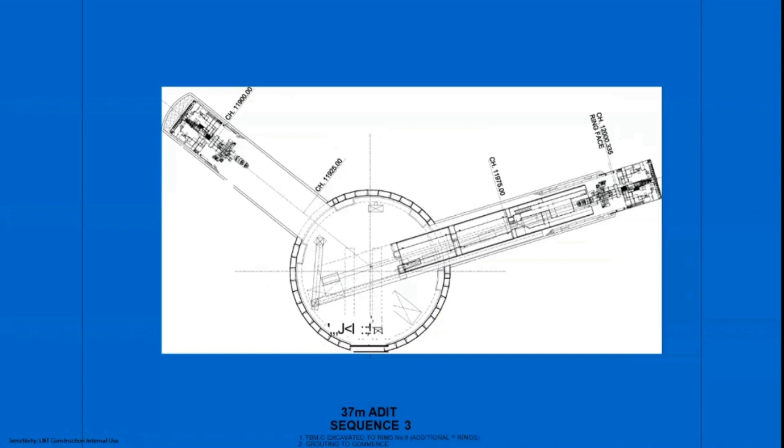This is a temporary conveyor we installed, so the TBM could run from here all the way to here before we had to put all the gantries in. You can see how it went forward, adding gantries. We went along to the point where we'd got the last one in. Then we could launch the second TBM, and we could put radius track in here so we could keep tunneling on this drive whilst we were installing the second TBM.

How was settlement and damage to nearby structures managed during the construction of the shaft and the TBM, as there were several high-value assets around? When we did the shaft sinking, it was very, very stiff clay, and the nearest structure you saw, the brand new apartments, they were actually down on piles, very deep piles, and the shaft was something like 60, 70 meters away.

The biggest problem we had there was adjacent to us, there was an old jetty where there were lots of houseboats, and the biggest problem we had was environmental in respect to noise, to be honest. We had very stringent requirements on the planning application for environmental considerations: noise, lighting, dust levels, vibration levels, and we just worked within everything, and we had no problem with settlement. The ground is very stiff clay, and you get very little settlement. It wasn't an issue at all.